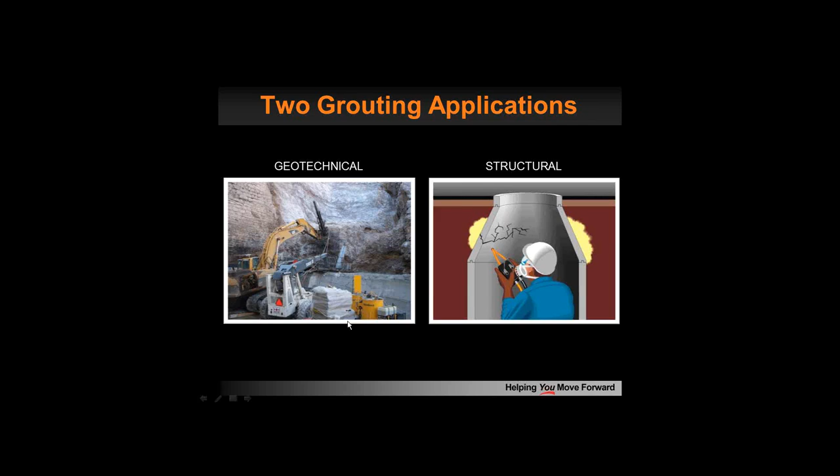Okay, well, I think it's first and foremost important to understand that grouting really has two applications: geotechnical applications and structural applications. When we look at structural, you're usually dealing with cracks or honeycombing or some type of repair in concrete, whereas geotechnical deals with some type of soil or rock application.

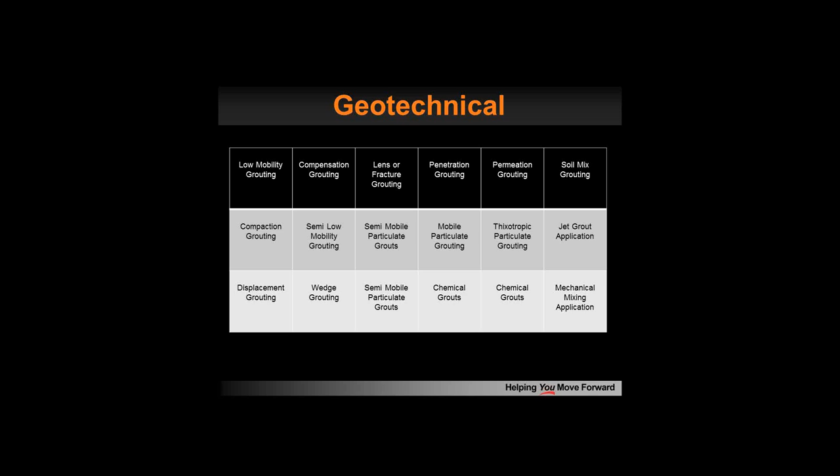When we look at geotechnical, there's a myriad of grouting types that you can use for different applications. I have a little chart that I put together here to give you an idea as to what's available out there and how to use them.

And I hope that that's helpful.

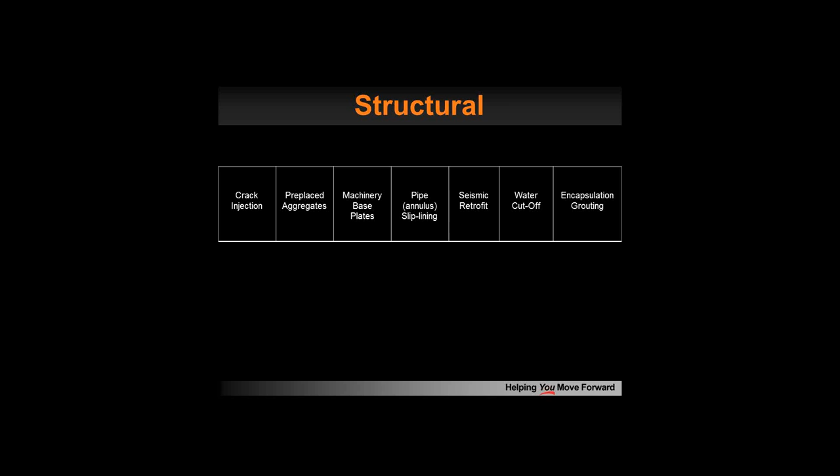When we look at structural applications, usually you're dealing with concrete, but you could be doing encapsulation type work for water cutoff, things like that. Machinery bases - a lot of work done on structural applications in the grouting industry. We really have three application levels: homeowner level, commercial, and industrial, and I give you some dollar amounts that break those apart for you.

Three types of contracts: time and material, engineered or specified type contract, and design build. The document I've submitted for this seminar, Contracting Means and Methods, I hope would be helpful for you to read, and if you have any questions, be sure to submit those.

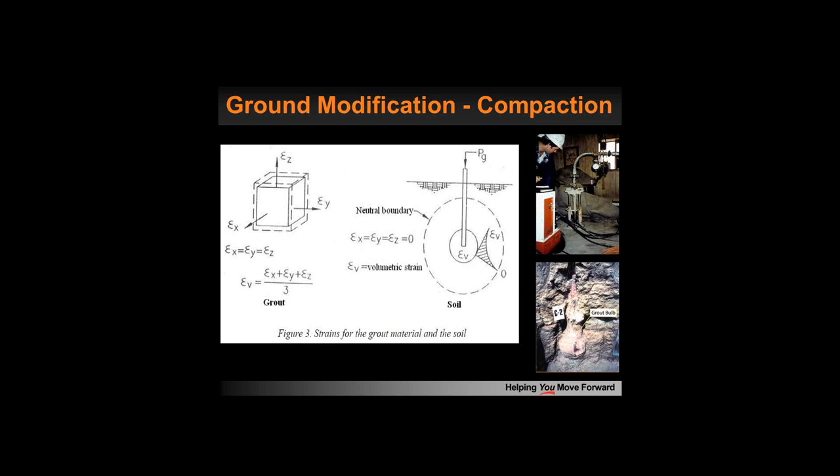When we look at grouting, ground modification involves compaction grouting, where we inject a very low mobility type grout that does not enter the pores of the soil, but simply displaces those soils. I've given you some equations here on how that works, dealing with weight-volume relationships and low mobility type grouts.

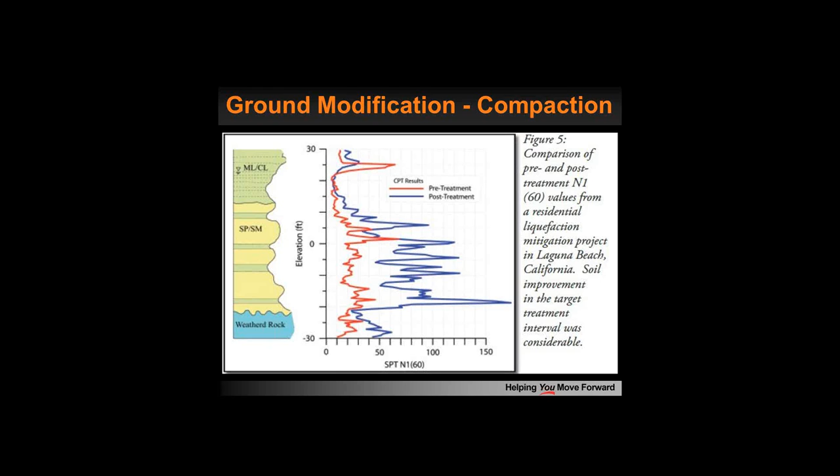And of course, no matter what type of grout you use, you want to make sure that you've accomplished your goals. So you're going to need to do some before and after type grouting, CPTs, SPTs, some type of verification work so you know you've accomplished your goals.

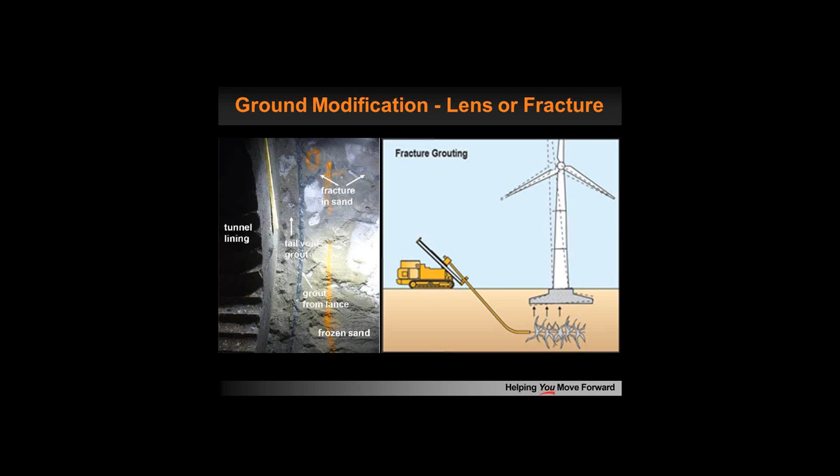Then we also look at claquage or lens fracture type grouting, where you use very limited volumes of grout to inject and create intended fractures in the ground to lift things, stabilize structures, and so forth, or to do contact grouting around tunnel linings. Can be doing rock grouting for dams, trying to fill these very minute fractures, filling of voids, or creating these fractures.

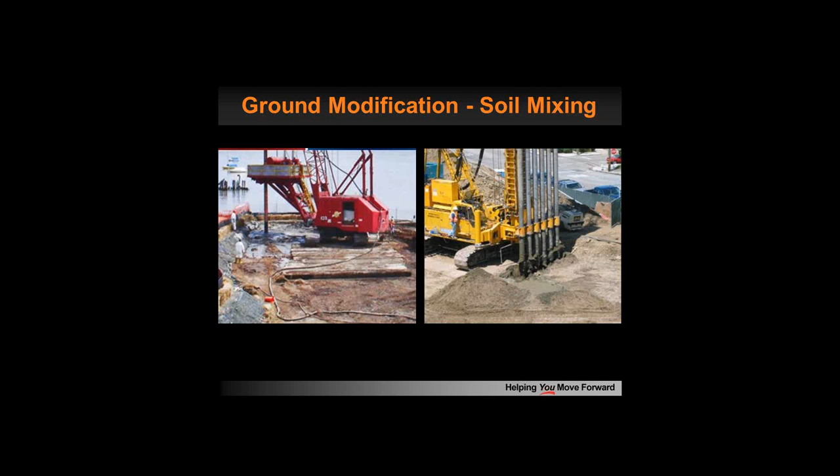Ground modification can also involve soil mixing, where we churn a large auger in the ground, churn these soils around, and inject cements, or could be chemicals, to stabilize these soils and create some type of diaphragm wall for stabilization purposes.

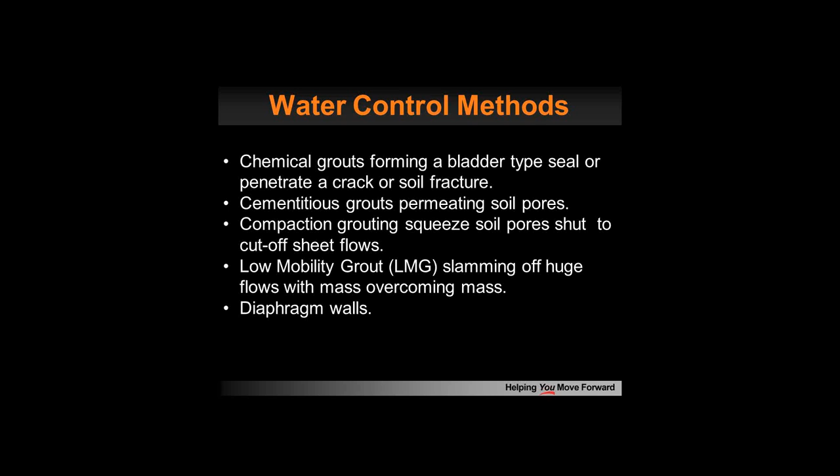Obviously, water control is a huge market for the grouting industry, and there are numerous ways that you can do water control, whether it be with chemicals, cements, low mobility grouts. When you read the document that I presented, I hope it helps you understand that sometimes it's best just to let the contractor tell you how he wants to accomplish your end result.

Releveling of structures, whether that be releveling someone's rear patio on a homeowner project, or releveling a 650-foot tall power plant chimney - it's very important, no matter how small or how large the project, that you know what your grout's doing in the ground. Control of grout is very important, and also knowing what you're accomplishing for your end results.

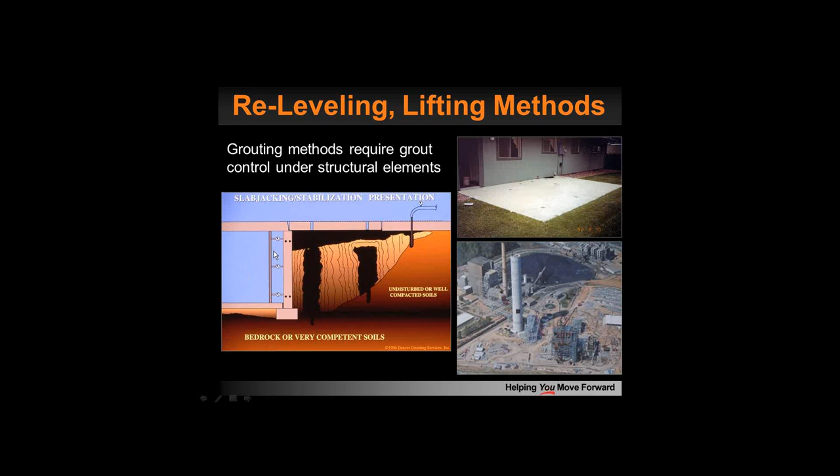For instance, if you're just doing slab jacking work, you may add a load to a soil that's already consolidating under its own weight. So maybe you need to do some soil stabilization work. But make sure you know that your grouts are not affecting adjacent structures or structural elements.

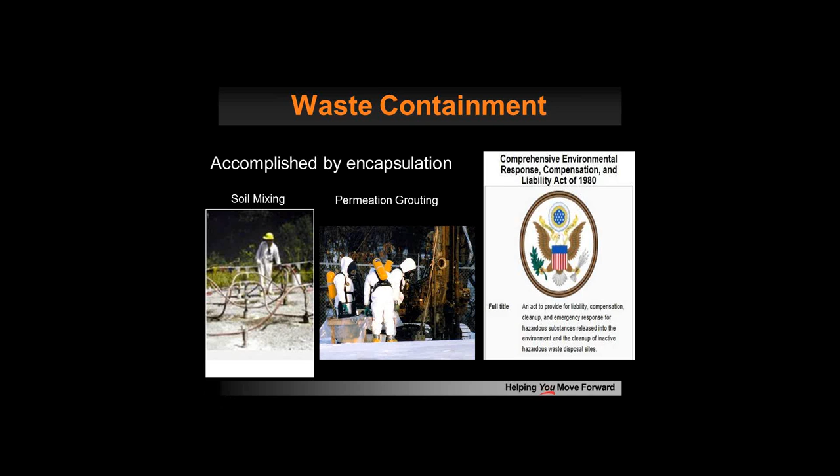Waste containment is a huge market in the United States and around the world. That's done by either soil mixing, permeation grouting, encapsulating hazardous wastes - a very large market for the grouting industry.

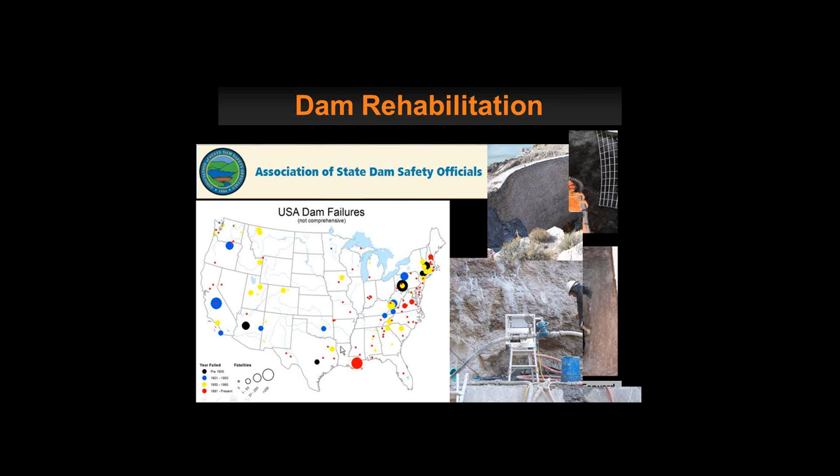Dam rehabilitation and even new construction for dams being constructed, usually dealing with rock grouting, concrete injection. But a lot of our dams are becoming outdated in terms of seismic capabilities and so forth, so there's a lot of dam work being done in the United States and around the world today.

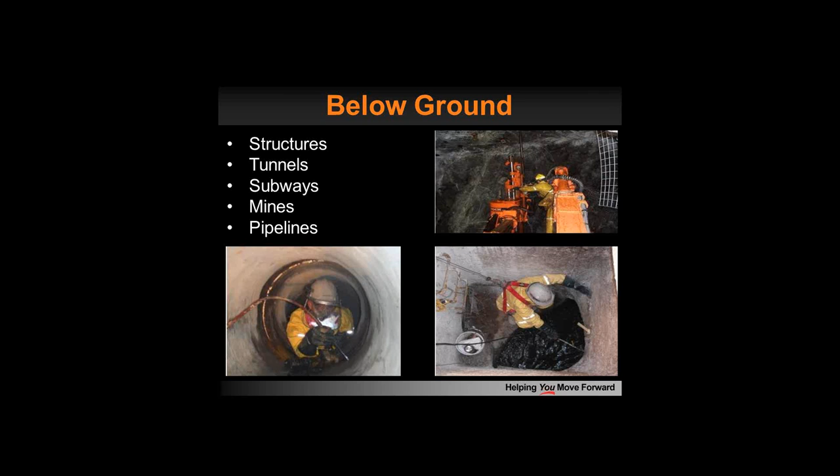When we look at below ground structures, tunnels, subways, dealing with confined space, MSHA regulations - a lot of work being done underground, and grouting has a perfect application in a lot of those areas.

Well, in my 5 minutes of presentation here, I hope our conclusion is that grouting is a multifaceted industry. It has unlimited opportunities and is certainly cost effective. It's based on engineering principles with experienced choices, but requires a team effort between the owner, the engineer, and the specialty contractor. Out of that team, choices are made for project applications and grout types. The goal is to make those choices wisely, and most of all, to make sure we come out the other end with a successful project.

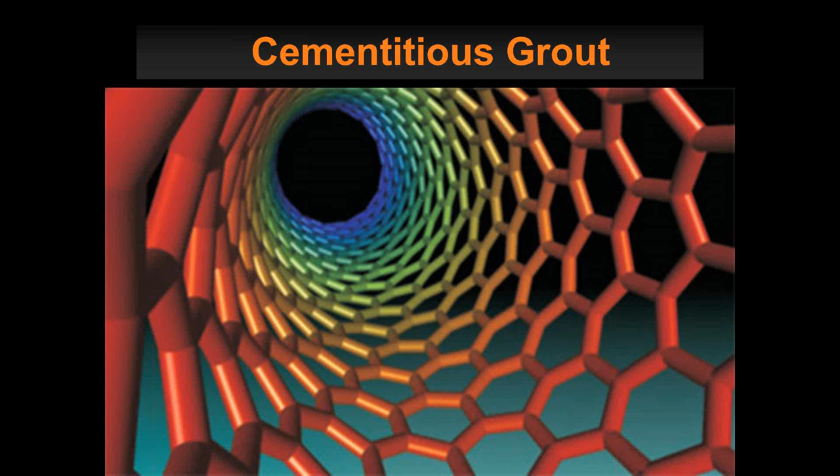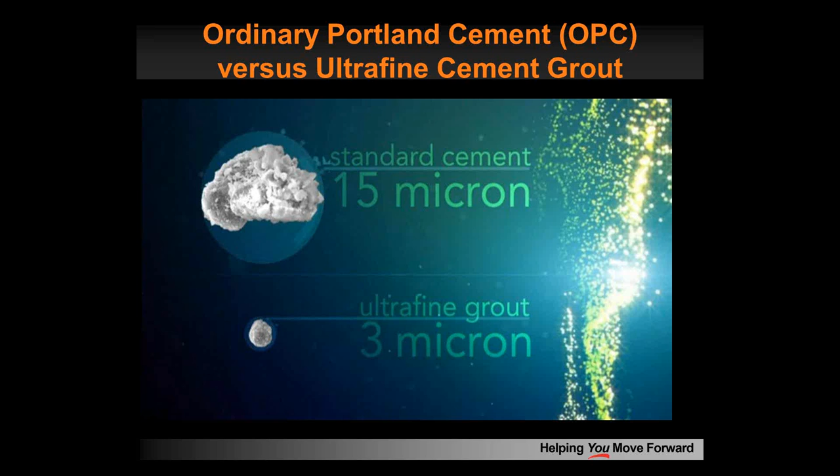One of the primary reasons for this difference in performance is due to particle size. As we can see here, the ultrafine particle on average is 5 times smaller than standard OPC grout. Therefore, it's better able to penetrate those smaller voids.

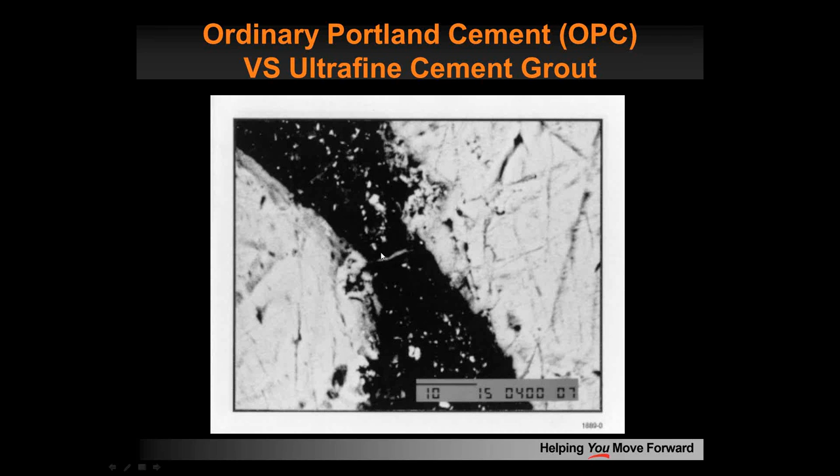To put this in perspective, the finest human hair has a diameter of right around 40 microns. So this constricted opening is approximately 5 times smaller than the finest human hair, and yet is being successfully permeated by ultrafine grout.

Fascinating. Another factor in a grout's ability to effectively penetrate, whether geotechnical or structural, has to do with viscosity and rheology. Contrary to the general public's understanding, the two are not synonymous. A liquid's ability to flow does not always correlate with its viscosity. Viscosity can be defined as a liquid's thickness or stickiness, whereas rheology is defined as a liquid's ability to flow. Although very near the same, they do not always correlate.

Here's a simple example of what I mean. We took ordinary tap water and ran it through a standard grout marsh cone test. The result was 28 seconds. We then added a common household rinsing agent, effectively reducing the surface tension of the water, and reran the test. This time it was 26.5 seconds. Although the viscosity remained the same, the water's rheology, or its ability to flow, was increased by 5%.

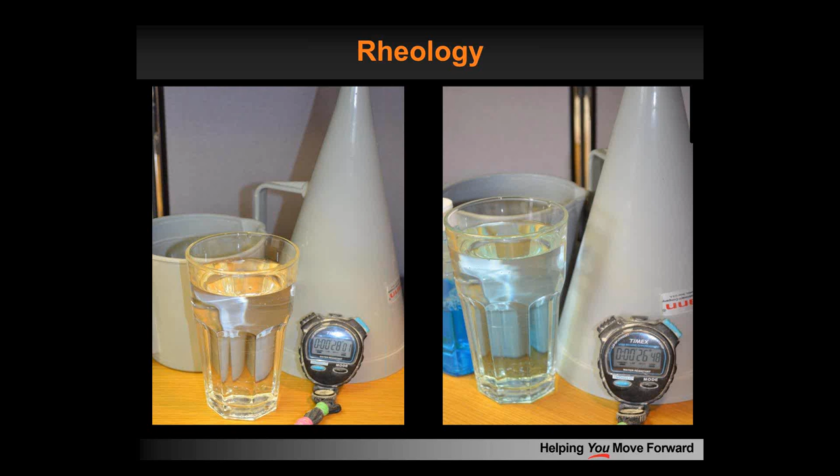This becomes a key factor in grouting applications and emphasizes the importance of selecting the correct additive for your specific project. In a great real-world application of this principle, we recently participated in a sand column demonstration at the Colorado School of Mines Grouting Conference, and achieved a complete 60 inches of vertical penetration in 1 minute and 20 seconds, using a 2-to-1 water grout ratio at only 8 psi. That's a remarkable improvement over past performances, directly attributable to the change in rheological properties through the additives. In summary, the two main defining characteristics of cementitious grout performance are particle size and flowability.

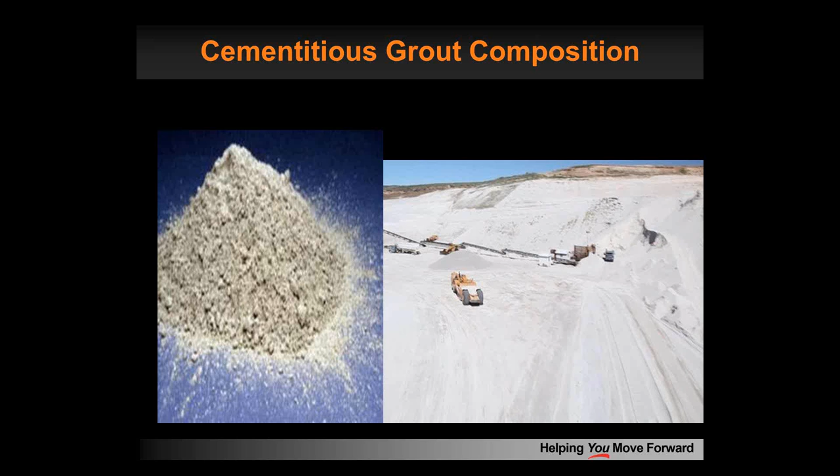Let's talk for just a minute now about grout composition. Although there are various types of cementitious grouts, most consist of a mixture of Portland or some other type of cement and other various types of supplemental cementitious materials known as pozzolans.

In order to illustrate the value of pozzolan, I need to get a little technical for just a minute. The strength and durability of a cementitious grout is derived from the calcium silicate hydrate, or CSH, that is formed as a reaction between Portland cement and water. The more cement you can get to convert to CSH, the stronger and more durable your cement. Without pozzolan, only about 75% of Portland cement makes this conversion. The remainder is converted to calcium hydroxide, which does not add to the strength and can actually be detrimental to the cement.

Pozzolans in and of themselves are not cementitious. However, because of their high silica content, when finely ground and added to cement and water, they produce a vital chemical reaction which converts the leftover calcium hydroxide to the desired CSH, thereby strengthening the cement and reducing the negative effects of the calcium hydroxide. This CSH conversion process can continue for decades.

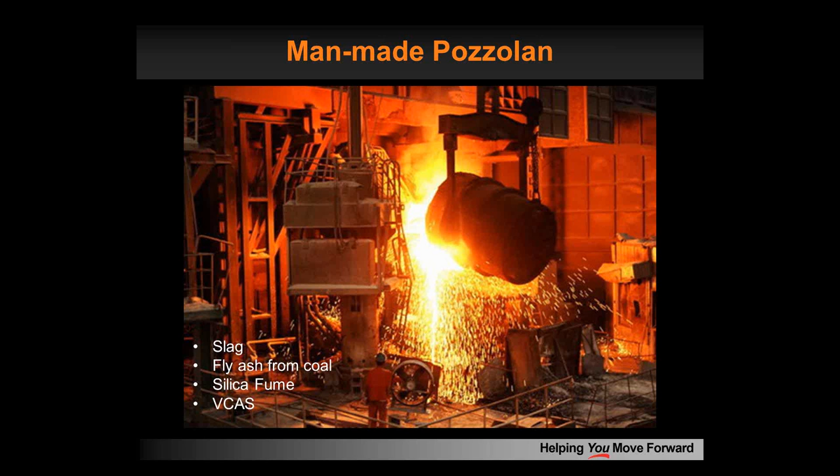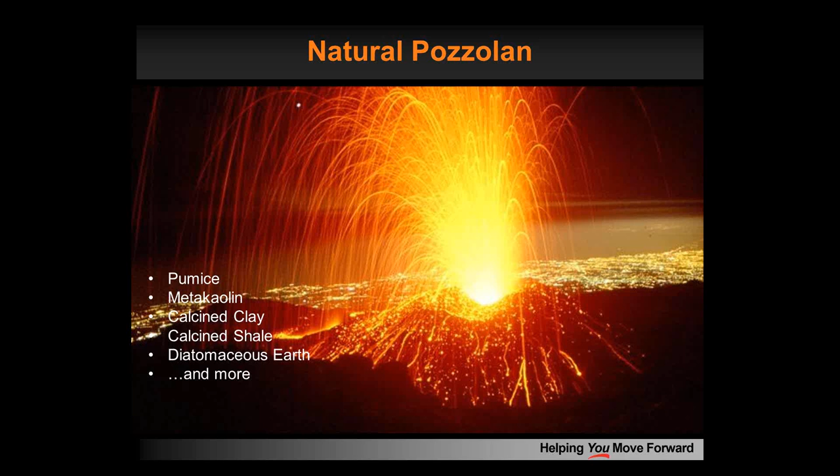These pozzolans can be either man-made byproducts such as slag, coal fly ash, silica fume, or VCAS. In addition to man-made pozzolans, there are also natural pozzolans such as pumice, metakaolin, calcined clay or shale, diatomaceous earth, to name just a few of the most common.

In summary, there are several benefits of adding pozzolans to cementitious products, and of course I'm more partial to the natural pozzolan and their consistent performance.

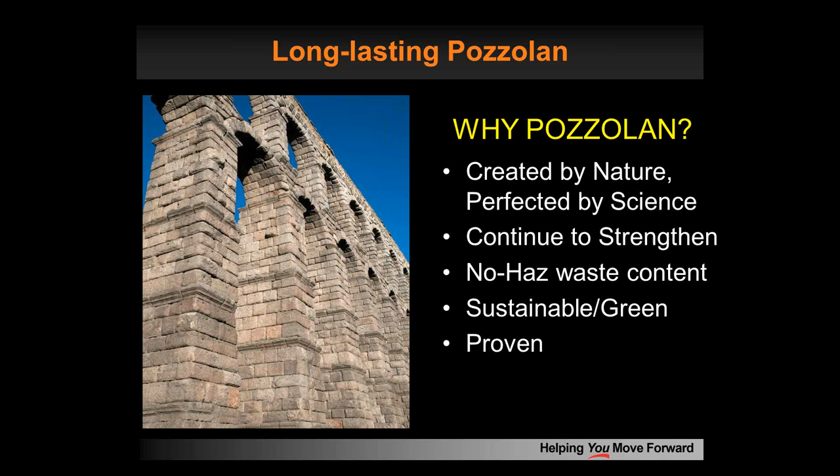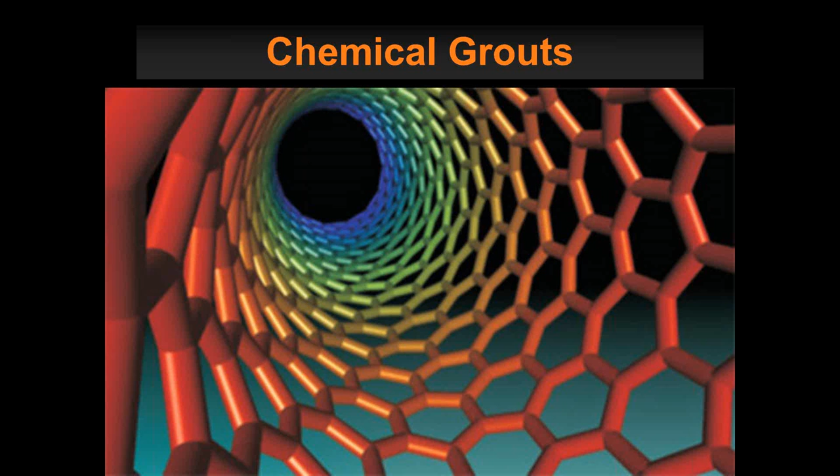Thank you, Brian. I'd like to start by talking about the various types of chemical grouts. Primarily there are two families of chemical grouts: polyurethane foams and chemically reactive, or solution, grouts. Within the polyurethane family, there's hydrophilic and hydrophobic foams, along with elastomers and urethane gels. Within the chemically reactive or solution grouts, there's acrylamide, acrylate, and silicates.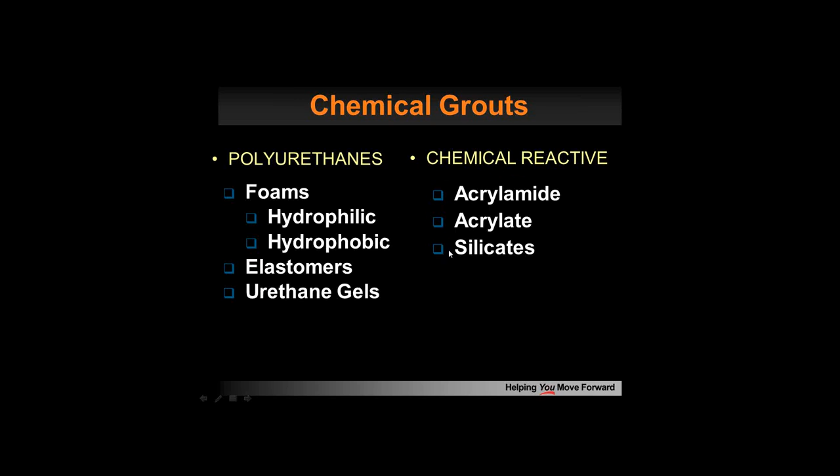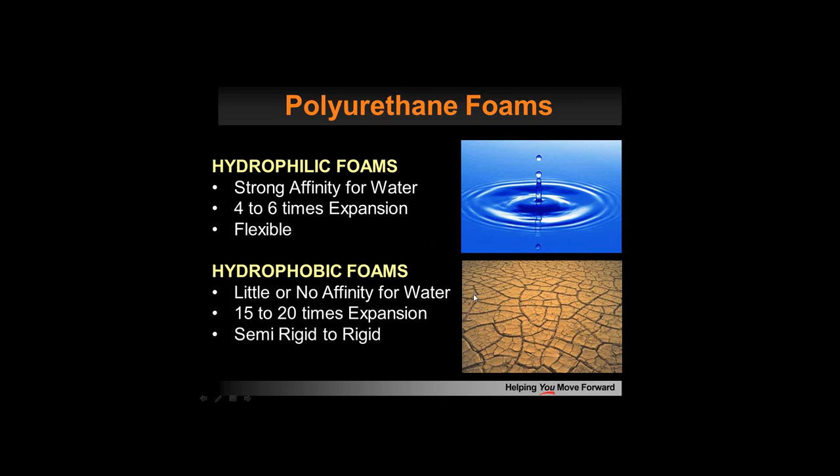Within the polyurethane foams, the two primary types used most often are the hydrophilic and hydrophobic. The hydrophilic has a strong affinity for water, likes to be in a wet, moist environment. They typically expand 4 to 6 times and are generally flexible. Whereas the hydrophobic foams have little or no affinity for water, meaning they can withstand wet and dry cycles, typically expand 15 to 20 times, and generally cure to a semi-rigid or rigid state.

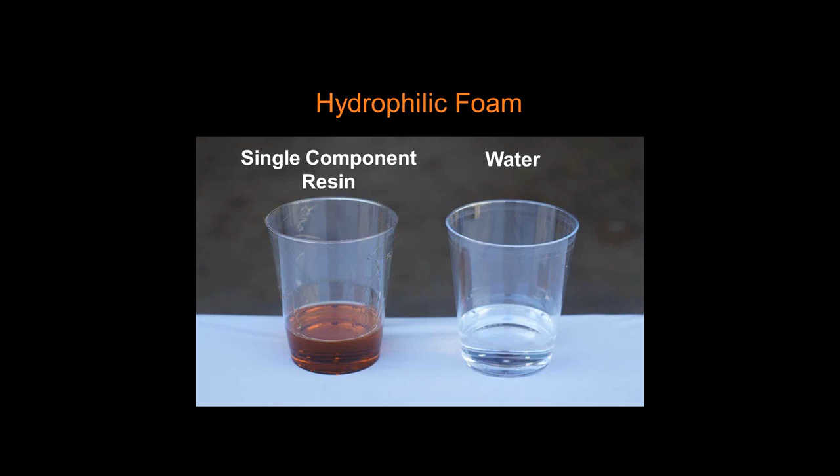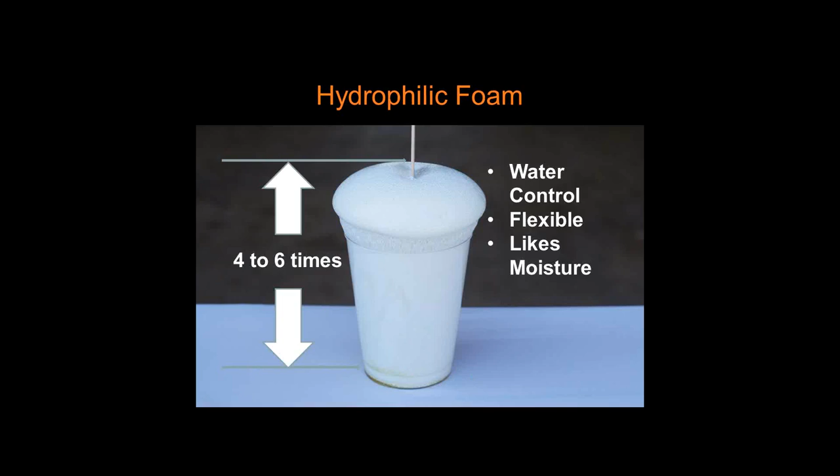Here's an example of a hydrophilic foam. This happens to be a single component. So when mixed with water, you'll note that the original volume here, once cured, expanded 4 to 6 times. Again, the primary use for hydrophobic foams or hydrophilic foams is water control. They're flexible and they like to be in a wet, moist environment.

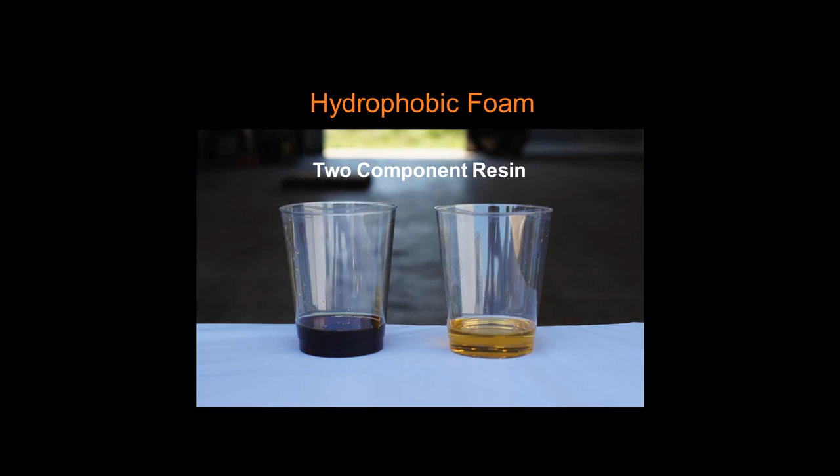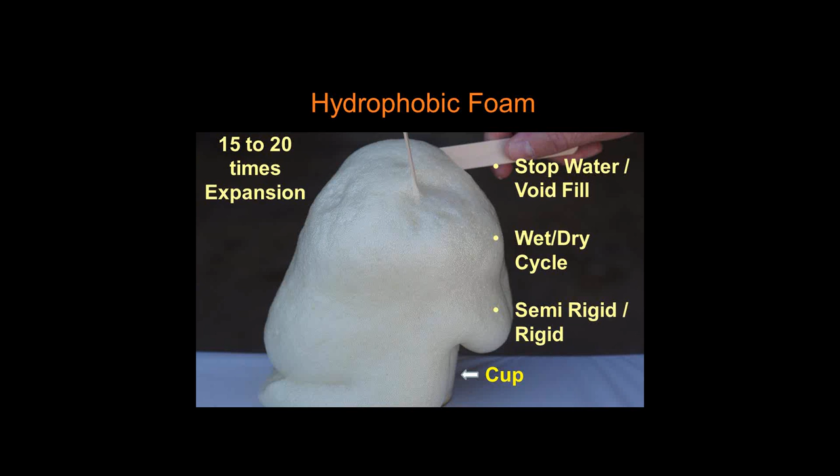An example of a hydrophobic foam, this example is a two-component resin. We have component A, component B. When mixed together, again noting its original volume, its expansion, if you recall, was 15 to 20 times, and obviously this picture depicts that. It's well exceeded the cup's capacity. Hydrophobic foams are oftentimes used to stop water or fill voids. They can withstand the wet-dry cycles and cure to a semi-rigid, rigid state.

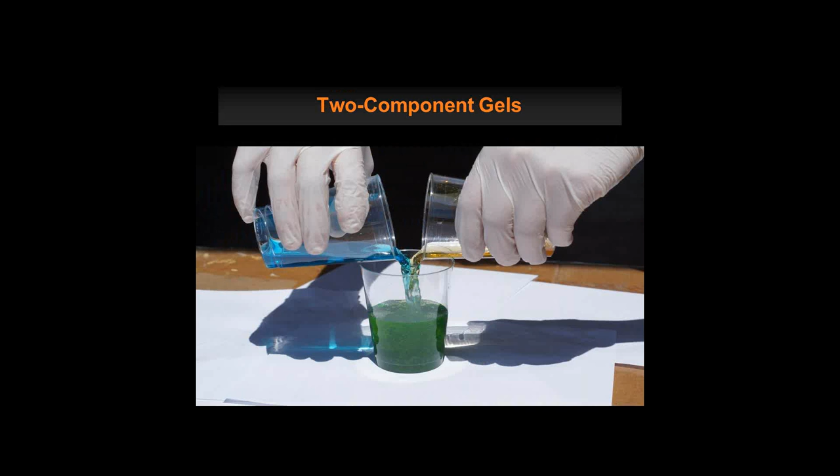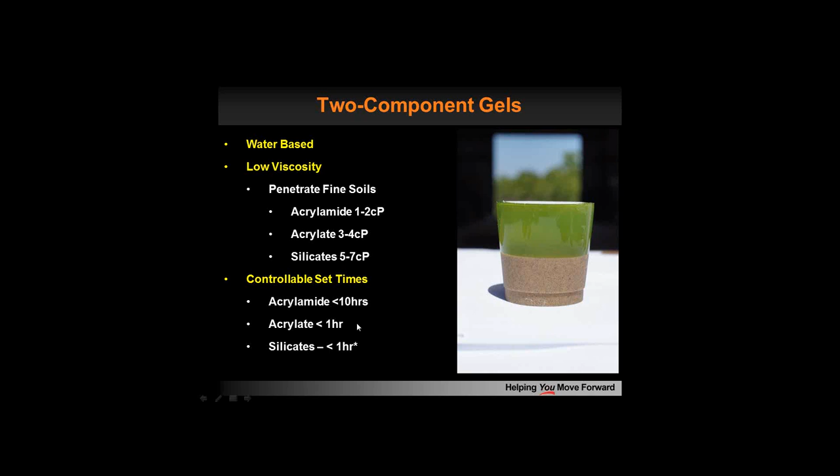One of the core components of the chemically reactive gels is they're water-based, but one of the benefits is that they have very low viscosity. Acrylamide generally has 1 to 2 centipoise, where acrylates are 3 to 4, silicates are upwards to 5 to 7 centipoise. They also have controllable set times. Acrylamide, for example, can be controlled anywhere from a few seconds upwards to 10 hours. Acrylates and silicates both are within about a 60-minute time window.

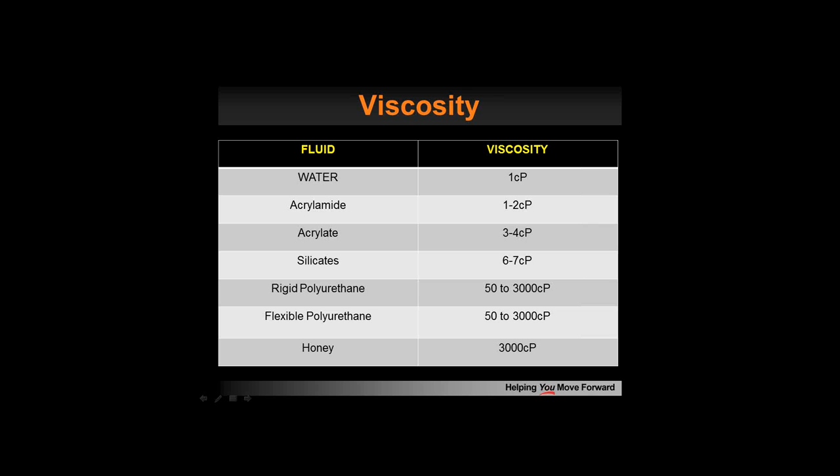Here's a quick example of the viscosities that we see, representing a table of water being 1 centipoise. Again, acrylamide versus silicates in that 1 to 7 range. The urethanes, the polyurethane foams, whether rigid or flexible, can range anywhere from 50 upwards to 3,000 centipoise. And to put that in perspective, honey has a centipoise of about 3,000 in regards to viscosity.

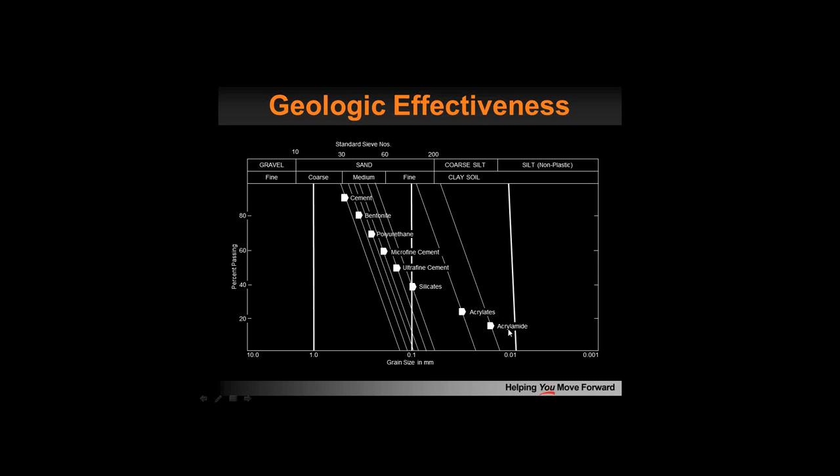This is a great chart that demonstrates the penetrability of the different types of grouts in the industry. This depicts the types of gravels or sands, essentially the different types of soils that may be encountered, and it depicts its ability to permeate into those soils. Cement here being on the far left, being the least able to permeate - this would be just ordinary cement. Dropping down to polyurethanes, then cements or cementitious grouts, ultrafine, silicates, and then acrylates and acrylamide being the most penetrable into clay-like soils.

Life expectancy is often a question that comes up. Acrylamide: 362 years. Polyurethane foams are roughly 75 years. Acrylates: 54 years. And then silicates are approximately 2 years - they're generally considered just a temporary solution.

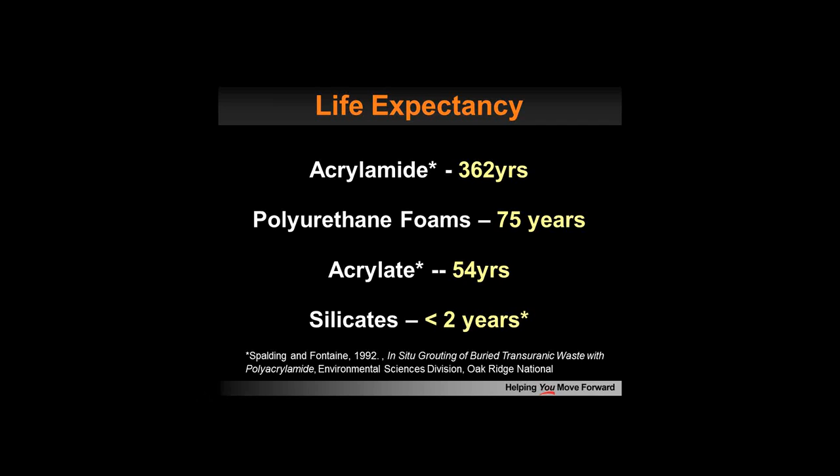Grout cost is also another question that comes up frequently. I want to caveat this slide with the fact that this is supplier cost for the materials, not injected costs by the contractor. They definitely are going to have additional costs over and above mobilization, labor, materials, and equipment. But this gives a scale of perspective.

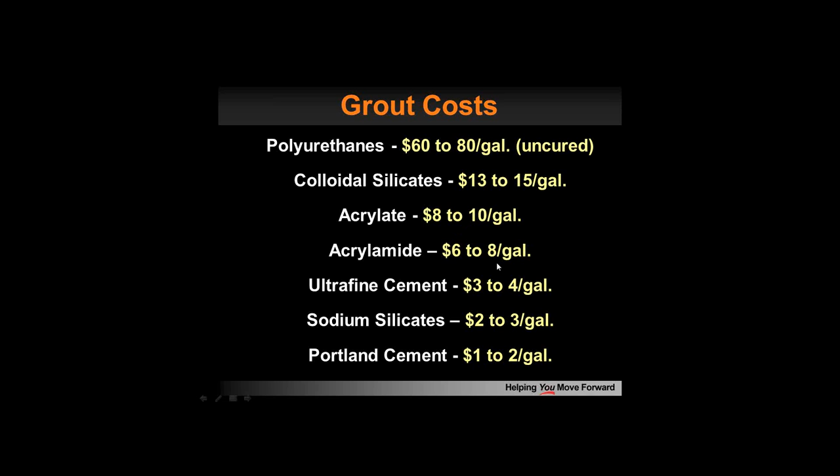Well, what I'd like to do is ask that we respond to one question that came across the transom. I think it's best that Brian answer this one: let's talk about what is the window of workability of cementitious grout?

Depending on the application, you typically have 2 to 4 hours before it hits what we call the initial set, which is when its workability is pretty much expired. So I'd say about 2 to 4 hours.

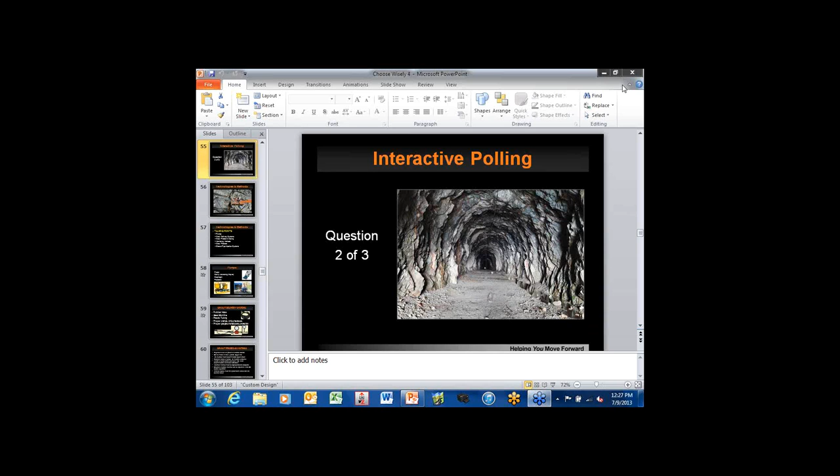Okay, thank you, Don. As we continue to look at some of the technologies and methods of placing grout, some of the talking points we're going to be covering are pumps, grout delivery systems, probes and casings, monitoring methods, grout packers, and sleeve pipe injection systems for getting our grout placed to its final destination.

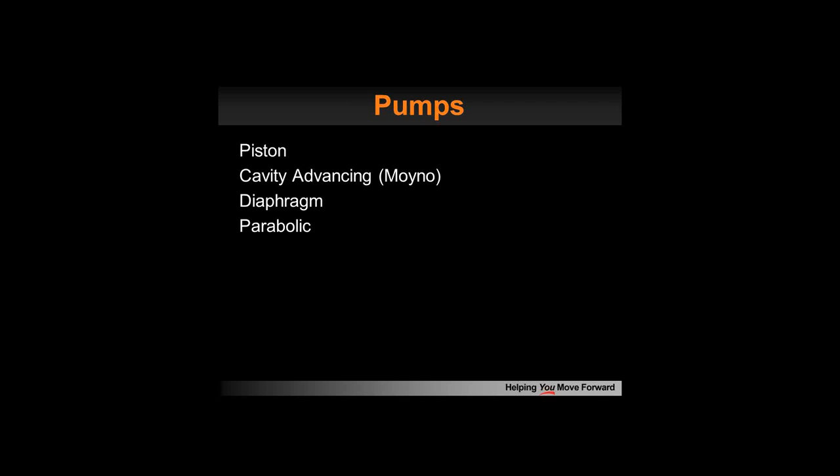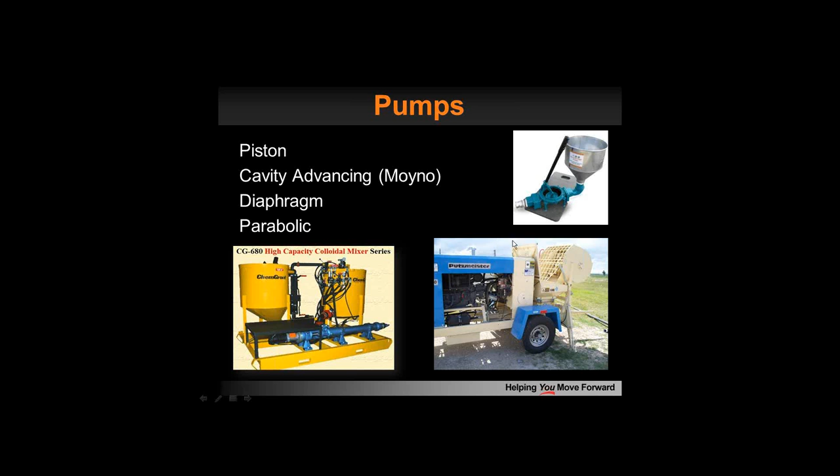When we look at pumps, you're dealing with piston pumps, cavity advancing pumps, diaphragm, parabolics, and the size of these pumps is going to vary depending on what you're doing and the size of the project. It can be anything from a modified concrete pump to a little hand pump that you just do maybe door frames with. There's just a myriad of pumps available out there to place these grouts with.

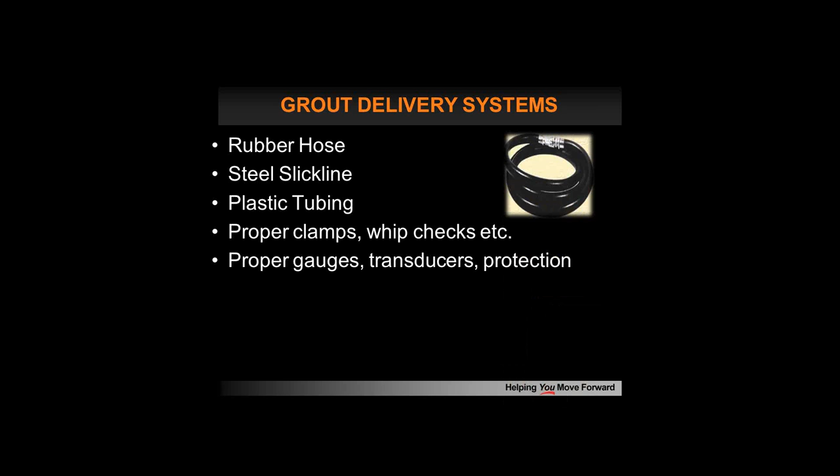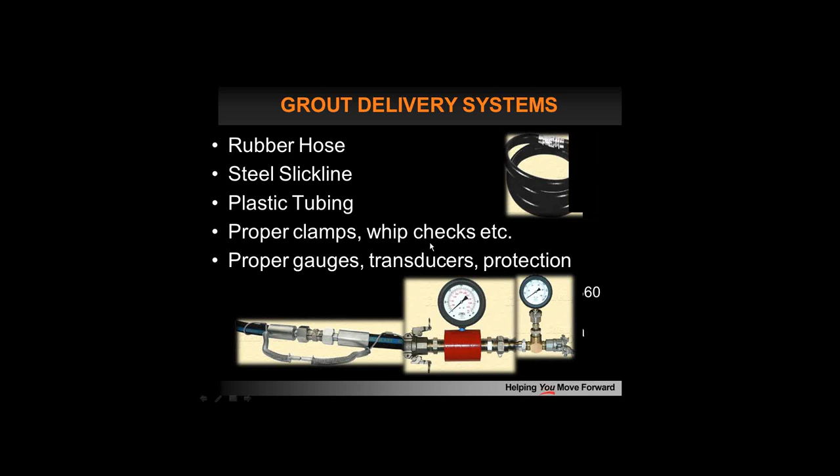Other delivery system requirements include rubber hose, and when looking at hoses we need to consider proper clamps, whip checks, and proper gauge and transducer protections so you don't get grout into your gauges and transducers. Also, you need to look at burst pressures and safety issues on these delivery systems. Just a word of advice there.

Grout probes and casings are usually the final delivery elements that place the grout where you want it, and they can be made of steel, plastic, or copper. The ID of the casing or probe must accommodate the type of grout that you're pumping.

Obviously, if you're pumping an ultrafine or a chemical grout, the ID can get rather small. If you're dealing with a low mobility grout, you're probably looking at casings with a minimum ID of 2 inches. But in any case, you need to look at the reaction forces from the ID of your probe, because there is a reaction that can push that casing or probe right back at you—it basically becomes a jack.

You need to look at your casings and probes for some of these issues. The length of your probe or casing will vary. If you're in a confined space and need to place your grout a good distance from the structure, you'll deal with short lengths of casing that screw together and can be sent through the structure to get the grout out there. If overhead isn't a problem, it's just a question of how far you want your labor force off the ground working with headers and so forth. So the insertion method must be appropriate.

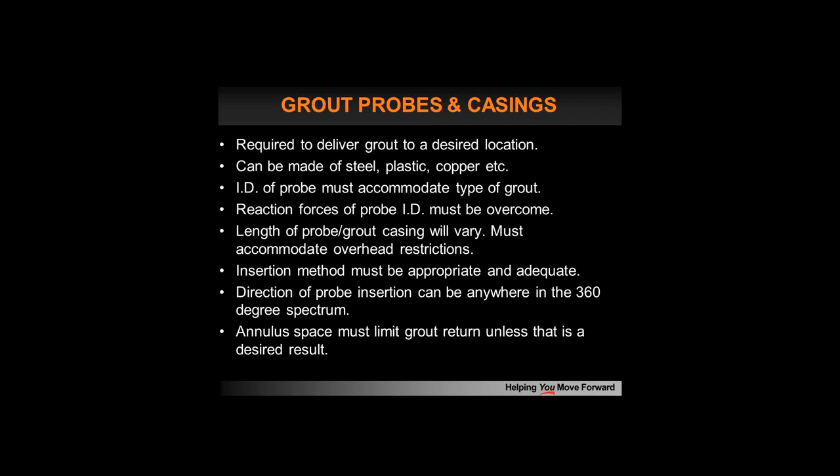The annulus space needs to be limited on most casings and probes, unless you're doing tremie-tube work where you want the grout to come up that annulus space. But most of the time you want that probe or casing to have a tight fit to whatever it is you're grouting through.

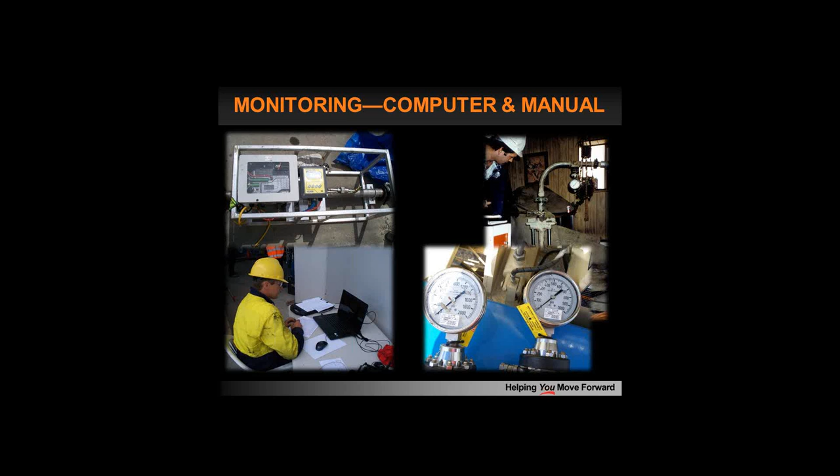When we look at monitoring, obviously the old gauges with clipboard and logging have been around the longest, but in today's world, computer monitoring is something you'll find more and more in a lot of specifications coming up.

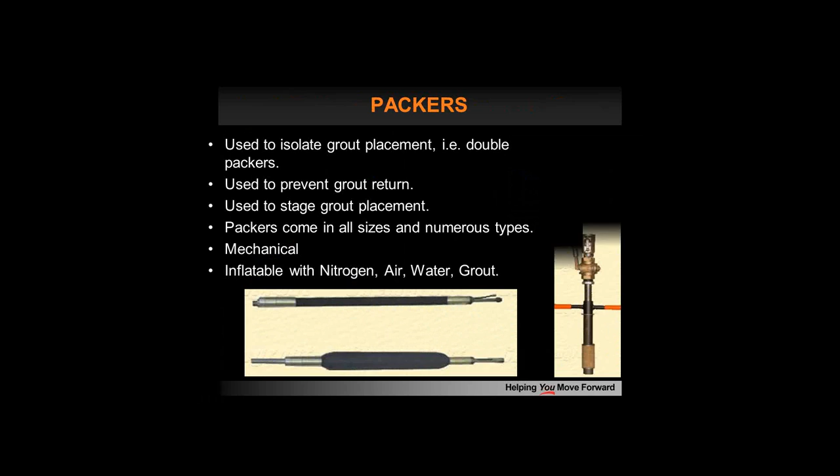If you're going to be around the grouting industry very long, you're going to be dealing with packers. They come in all sizes and different types, but the two basic types are either a mechanical or an inflatable packer.

Finally, we look at sleeve pipe injection systems. Due to the length of time we have, I don't have a lot of time to explain exactly how a sleeve pipe works if you're not familiar with it. But the nice thing about a sleeve pipe injection system is that once it's in place, you can do multiple injections over periods of time, allowing you to go back and take care of windows or areas where you didn't get the water cut off. You can do re-injections - it's an excellent system for that type of work.

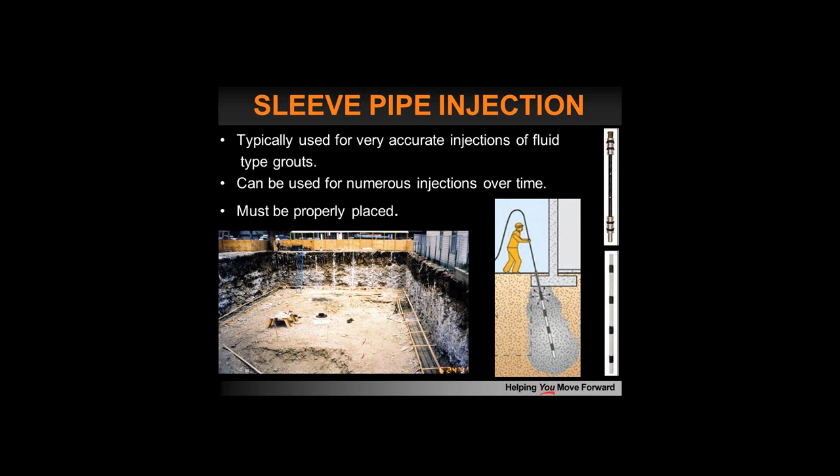I've been asked to talk about some real-world applications of cementitious grouting. As we learned in the beginning, there are two major categories of grouting: geotechnical and soil stabilization, or fracture and microfracture repair, the structural part of that.

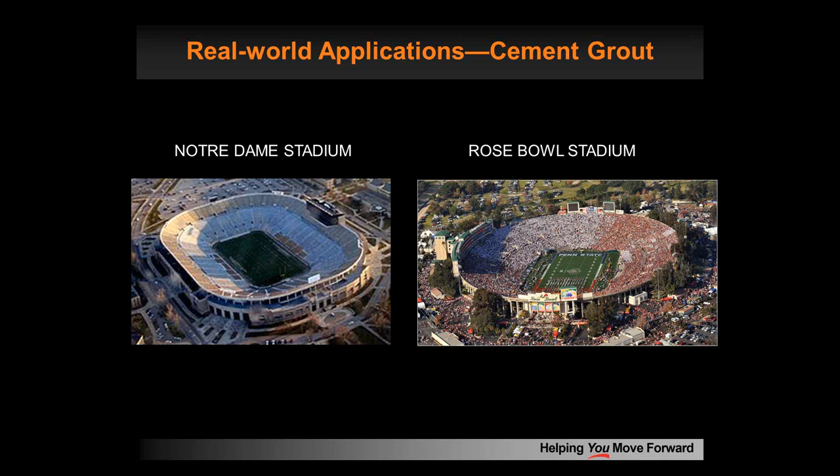Here's a couple of recognizable but not necessarily highly advertised projects where geotechnical grouting resolved some very serious soil issues. Portions of these two stadiums were settling, and the underlying soil needed to be reinforced and stabilized. This was accomplished through successful permeation grouting. In both projects, we needed the grout to effectively permeate the soils beneath the structure for stabilization purposes, and in some areas even needed to lift and restore the structure to its original position. That was quite a large project.

Here's another example of a similar use. The LA Hollywood Metro Tunnel was settling in various sections. A highly skilled team of experts used grouting to restore these problem sections to their original elevation, while securing and strengthening the surrounding soils to prevent future settling. This was a very complex project that required dozens of laser monitors to ensure the surrounding buildings were not disturbed.

One well-known application of structural grouting took place at the Waste Isolation Pilot Plant located near southern New Mexico. In their efforts to contain hazardous nuclear waste, the Department of Energy commissioned Sandia National Laboratories to seal tiny microfractures found in the walls of the salt caverns deep beneath the ground surface, where they were storing transuranic waste. This was successfully accomplished by drilling ports and pumping ultrafine cementitious grout into the cavern walls. The grout was able to penetrate these microfractures, and according to the scientists at Sandia Labs who developed the grout, it will effectively seal them for thousands of years to come.

While at the WIPP site, we were trying to keep the hazardous waste contained within the caverns. Here at the Lake Mead project, the objective was to seal the microfractures to prevent water from the lake above from penetrating the tunneling process going on below.

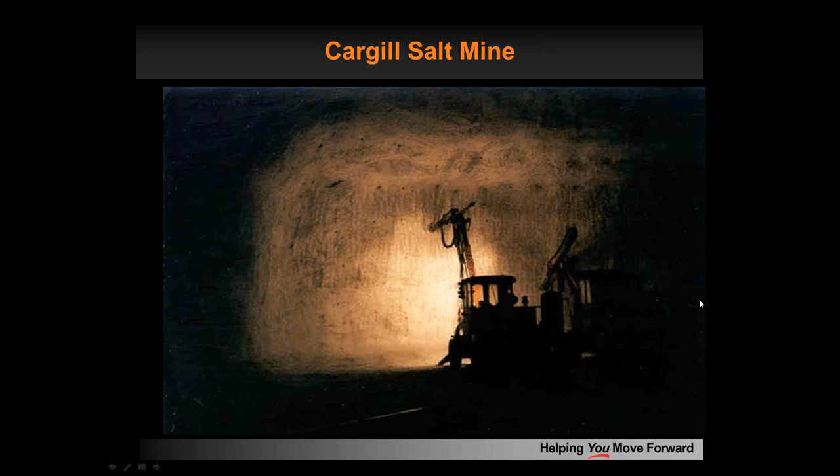And finally, we have an example of an ongoing grouting project at an active salt mine just outside of Minneapolis, Minnesota. The purpose of this grouting is very similar to that of the Lake Mead intake tunnel, but it is continuous in that as the miners extend the existing tunnels forward during the mining process, it is critical for them to be able to grout and effectively seal off any newly exposed surfaces that show signs of microfracturing. I'll now hand this back to Britt, and he can cover some real-world applications of chemical and cementitious grouts.

Thank you, Brian. Moving on to chemical grout applications, one of the first projects we'd like to showcase is a tunnel boring machine project that occurred in Houston. The project consisted of installing a 72-inch sanitary sewer trunk line, which required a 96-inch borehole that was being installed using a Lovat tunneling machine.

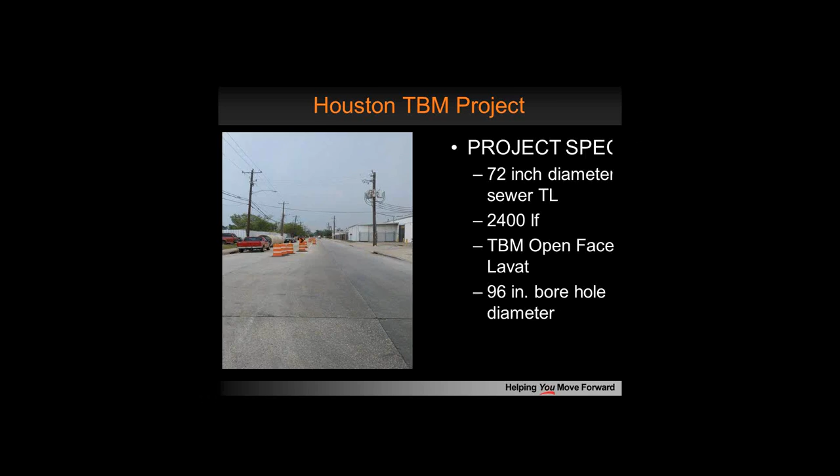They anticipated the soils they were to be tunneling through would be homogeneous, but they encountered a layer of material that actually softened. This caused the tunnel boring machine to pitch up slightly. To counteract that, they injected through the face of the machine chemical grout to strengthen that material, allowing the TBM to get back on alignment and successfully finish the project.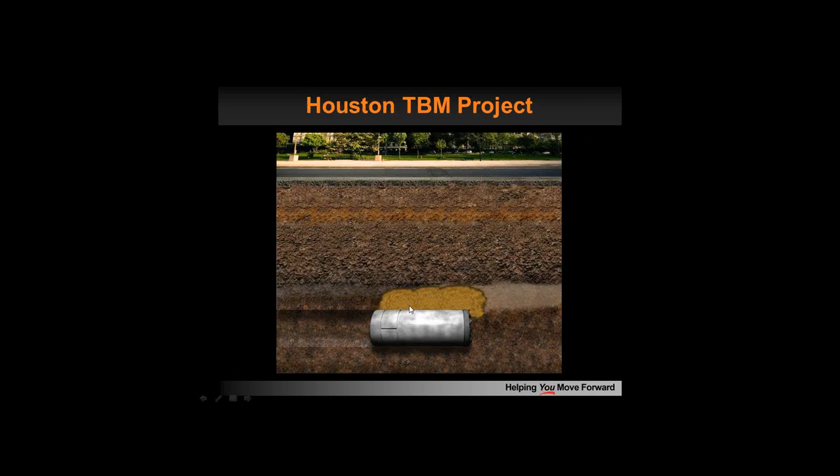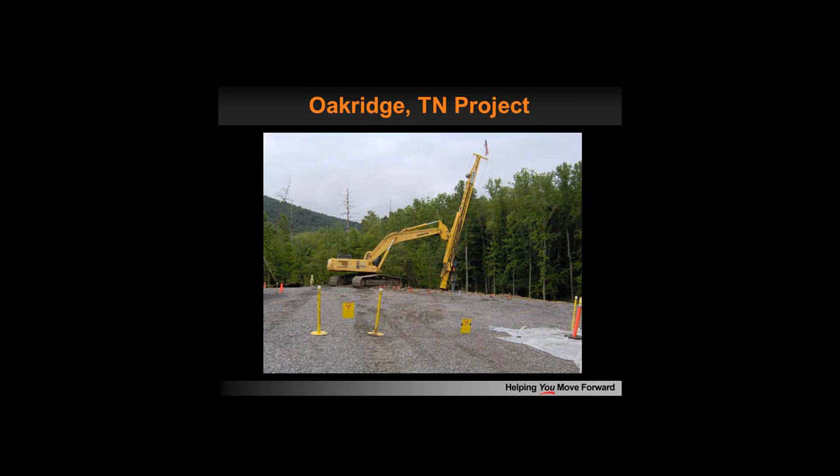What had happened was underground water was migrating through the hazardous waste and carrying it to local streams. The government did a 20-year study on the different types of grouts they wanted to use and concluded that an acrylamide chemical grout was the one to use.

You can see here there are multiple injection points throughout the entire trench that was encapsulated. One of the unique things here was the gel time set for this was approximately 8 hours. So they pumped for approximately 8 hours until the material encapsulated and gelled in place.

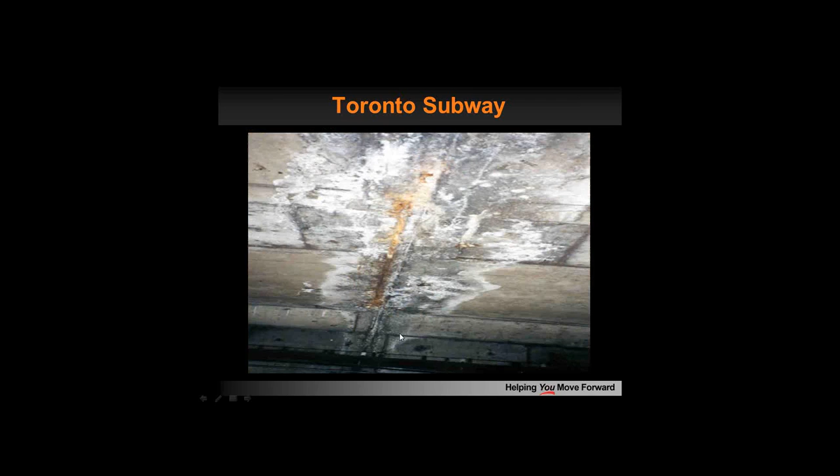Another project that has been a great success and ongoing for about 15 years now is the Toronto Subway, or TTC. This was a water control project where Toronto, like any underground structure, has encountered water leakage over time, and they've combated that by the use of chemical grouts and encapsulating that tunnel.

They're so efficient at it that they've self-performed the work, both the drilling crews as well as the injection crews. They've designated their own internal rail cars for their pumping systems, and it's been very successful.

Moving on now, a question we get a lot is, are cements and chemicals competitive, or do they complement each other? Our answer is they complement. Oftentimes there are projects that require both cement and chemical grouts. Each has its own unique characteristics that are designed and engineered for, and oftentimes can complement each other.

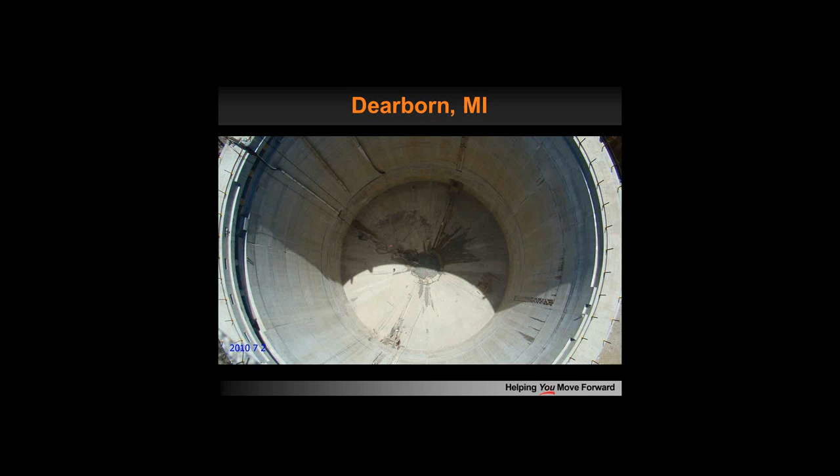And here's an example of that: Dearborn, Michigan. This is a sanitary sewer overflow tank, and from this picture, to give perspective, this is 120 feet in diameter across. These walls are approximately 7 feet thick, and this is approximately 150 feet in depth.

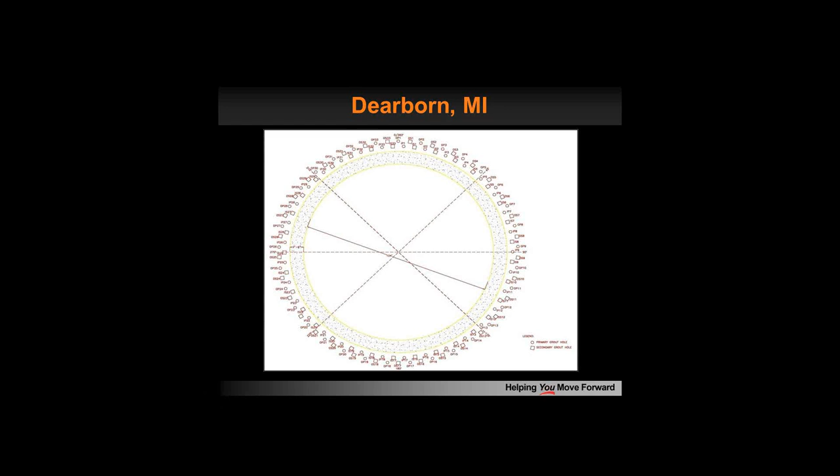What they determined was, prior to construction, there was an artesian situation with high water pressures that wouldn't have allowed them to construct it. The solution was to come in and pre-excavation grout around the perimeter of the planned location, using both cementitious grout to fill the larger voids, and then to capture the finer voids in the matrix porosity of the geology with chemical grout.

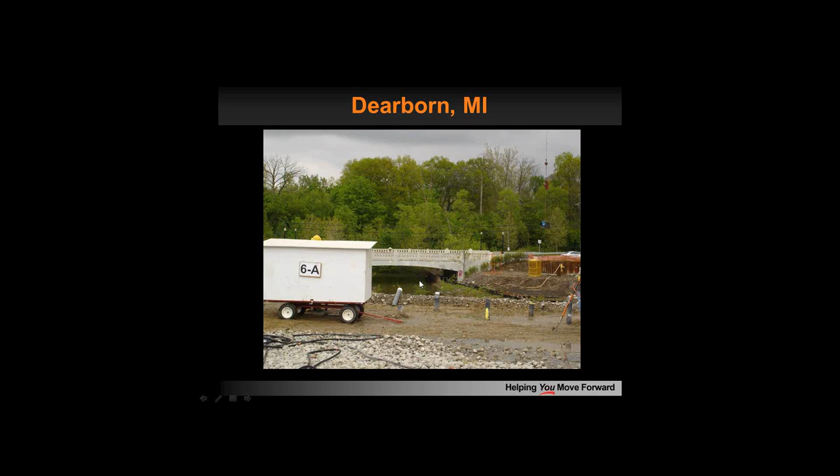You can see here that they were able to successfully grout very close to a waterway with both cementitious and chemical grout, and it ended up being a very successful project, nearly eliminating all of the inflow, or reducing the inflow to almost a negligible amount to allow for construction.

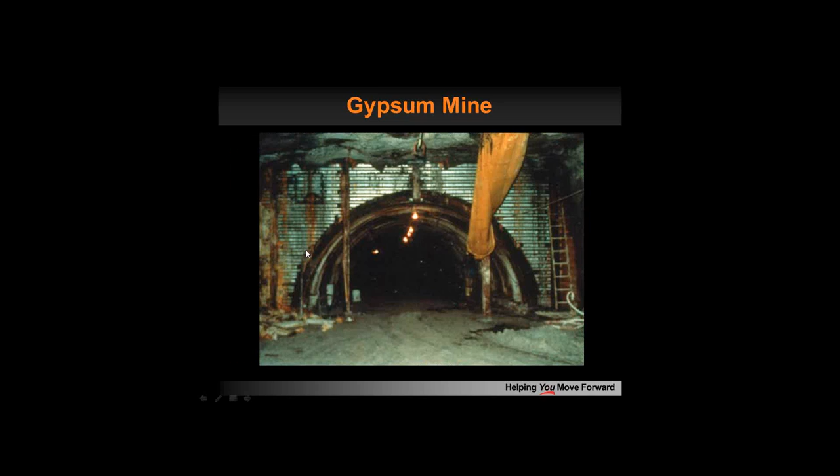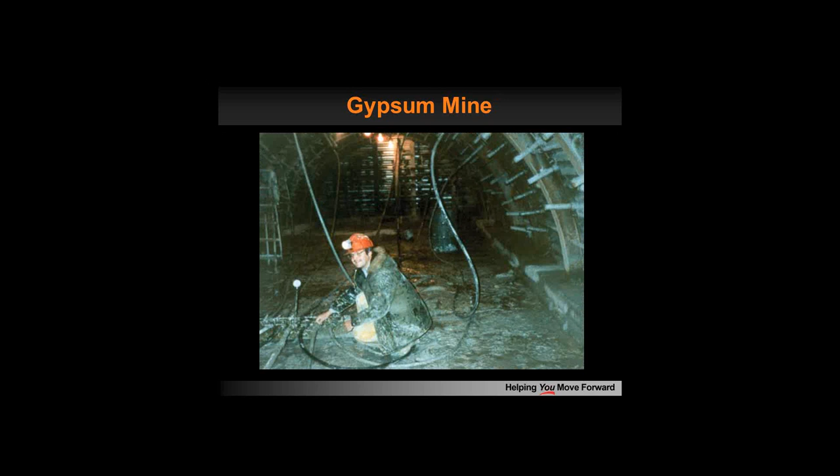Another project, this is a mine application. This is a bulkhead where both chemical and cement were used. Within the chemical family, there was polyurethane foam along with a chemical or solution grout, chemically reactive. This bulkhead was leaking over time, and the leak was so severe it actually flooded the mine. They came in and, like before, tackled the larger voids with cementitious grouts and the finer matrix porosity with chemical grouts, the chemically reactive, and then used polyurethane foams to also seal up any voids in and around the bulkhead. It was very successful.

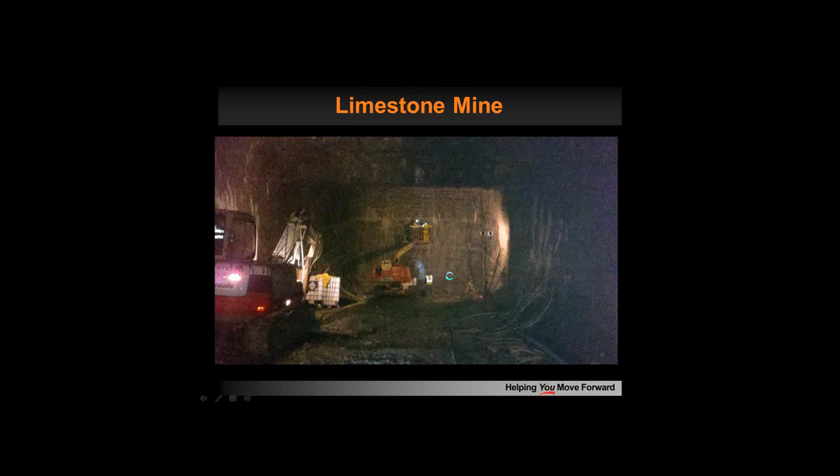Moving on to a project again where both cement and chemicals were used. This is a limestone mine where water flow was a big challenge. Like what Brian explained earlier, this was a grout and blast configuration. This slope needed to transition down through a water-bearing zone, and because of the matrix porosity, it wasn't able to be successfully grouted with just cement. So they used both cement and chemically reactive gel. They would inject upwards of 80 feet in front of the face in an umbrella pattern around the slope, then come in and blast approximately 40 feet and repeat that process to walk down through the slope. It was very successful as well.

Here's an example where they've excavated, or blasted through, some of the gel that filled one of these little pockets.

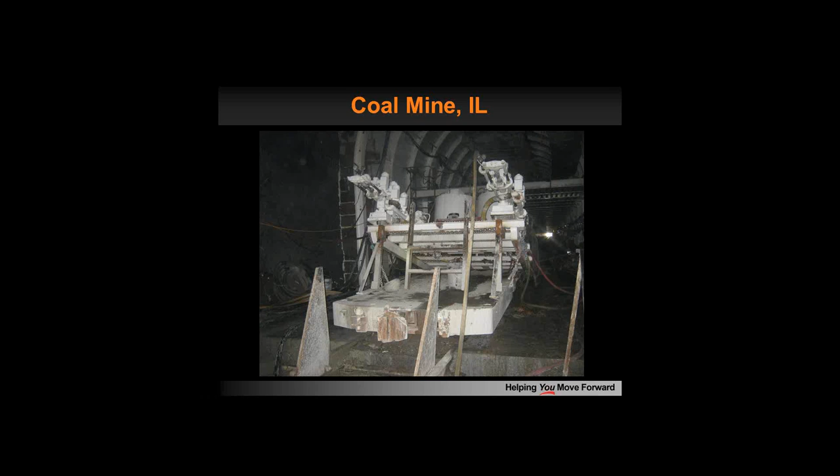Moving on to a coal mine project in Illinois - same challenge, sedimentary type bedrock, slope had to go down through water-bearing zones. Again, cement and chemical, not competing but complementary. This particular project was unique in that they did all of the mixing at the surface and pumped it down to this staging, or agitation plant, and then pumped it into the face of the structure or the face of the slope. Again, the same blast-grout configuration, but a very successful and very happy owner at the end of this project.

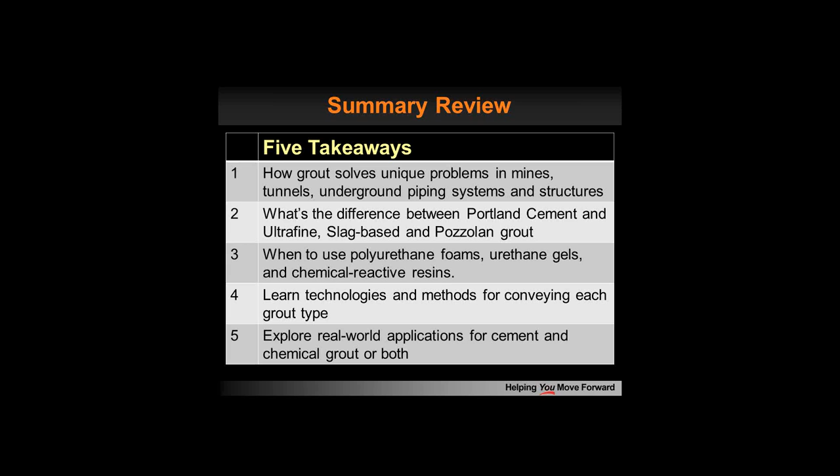So when we started, Sam opened up our minds to discuss what's possible with cement and chemical grout. Then Brian differentiated Portland cements over ultrafine, as well as slag over pozzolan-based cement grout. Then Britt demonstrated some of the critical attributes of chemical grout. Sam came back, touched on technologies and methods for conveying grout, and Brian and Britt both talked about real-world examples of each grout type, and of course Britt highlighted projects where both are required.